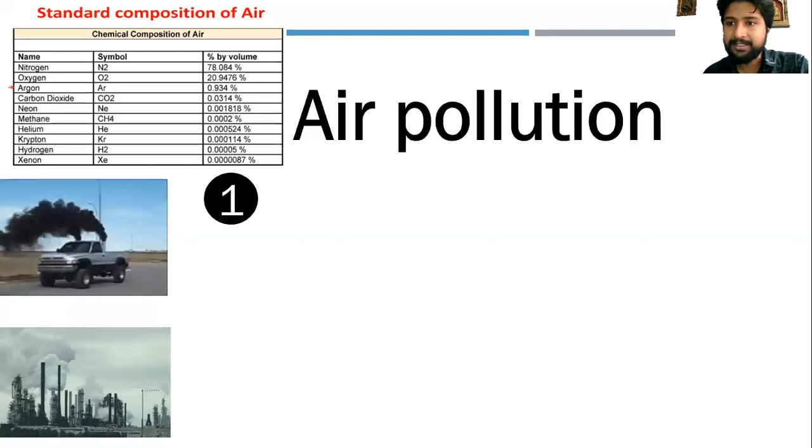Suppose any kind of chemical change occurs in the atmosphere, or any solid, liquid, or gas enters the atmosphere. If that change is useful for mankind, we never call it pollution. But if it causes harmful effects on human health and society, or reduces visibility, or corrodes our environment, then only we call it pollution.

Now look at the definition: Contamination of the atmosphere by gaseous, liquid, or solid waste or its byproducts - that is pollution. This contamination by solid, liquid, or gaseous wastes or byproducts can endanger life, attack materials, and reduce visibility. That is air pollution. Hope I'm clear.

Now the question is, if I'm talking about controlling air pollution, from where can we take control measures? We need to know the sources of pollution, from where it is emitted. There may be two sources of pollution: either the source may be fixed, established permanently, like factories, refineries, power plants - these sources are fixed and we can identify them.

Whether we're talking about a stationary source or a mobile source, in both cases this air pollutant may be of two types: particulate matters, where PM refers to particulate matters, or gaseous pollutants. In this lecture I will mainly focus on the stationary source and especially the particulate matter.

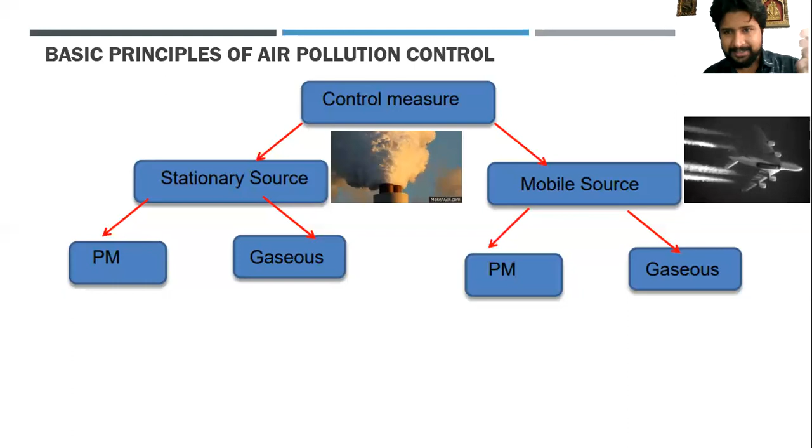Now what actually is particulate matter? I'm sure you've seen particulate matter - when you travel long distances, you can see black carbon particles get deposited on your face, you can feel that. Also, when you pass a beam of light into a dark room, you can see the dense particulate matter clearly. So let's first understand what particulate matter is, then we'll proceed further.

Microns is the size of the particulate matter which is suspended into the atmosphere. And this is PM 0.1 microns. Now, this particulate matter is usually suspended into the atmosphere. And if I talk about the chemical composition of this particulate matter, there may be some different kinds of chemicals, like there may be nitrates, there may be sulfates. It will depend upon the locality from where we are collecting the air sample.

Let's say we are collecting an air sample from the industrial area. In that area, you can find heavy metals as well in the atmosphere, like zinc, like copper. So this particulate matter is composed of solid plus liquid. Just make it clear, it is composed of solid plus liquid. Some moisture is also present in the atmosphere in the form of fine droplets. You can't see it with your naked eyes, it's very difficult.

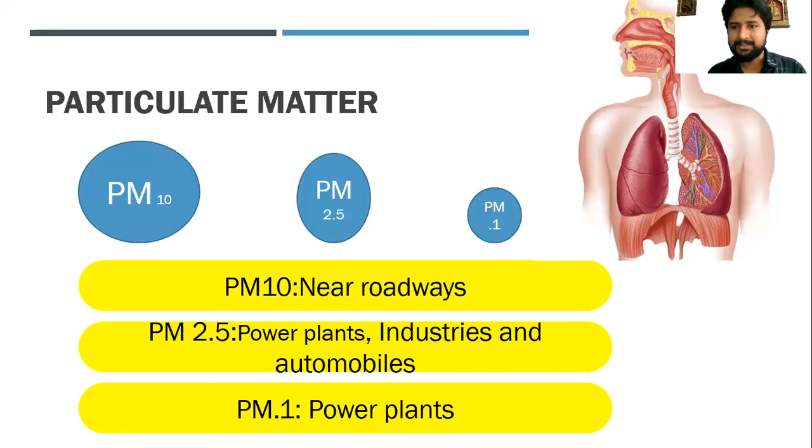Hope I'm clear. So the same thing has been written here: what is particulate matter? PM is a widespread air pollutant consisting of a mixture of solid and liquid particles suspended in the atmosphere. It's not gas. I have mentioned here 3 sizes. Particles smaller than 10 microns can just stick below your throat, and it's very easy to spit them out.

And particles smaller than 5 microns can reach up to the bronchial tubes, that is at the top of the lung, which I have told you. Bronchial tube, this is what? This is the bronchus. It can reach up to this region.

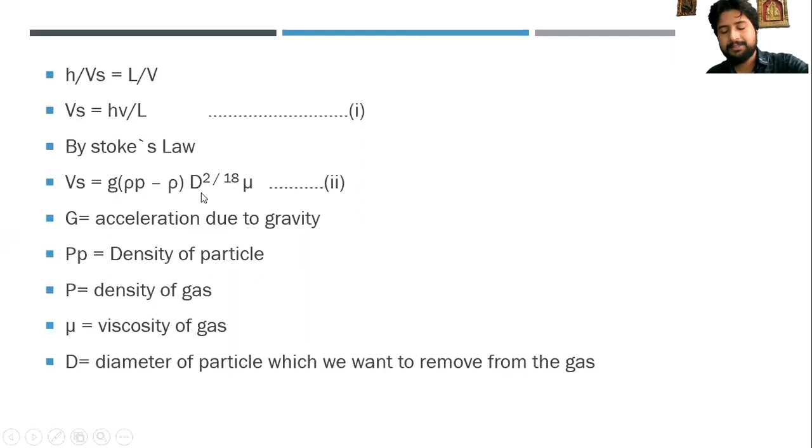And after equating both equations, you will get your final result, that is d is equal to [18 mu H V upon L g (density of the particulate matter minus density of the gas)] raised to the power 1 by 2. This is the diameter of the particulate matter. So particulate matter of this diameter will be filtered when we take a particular height and a particular length.

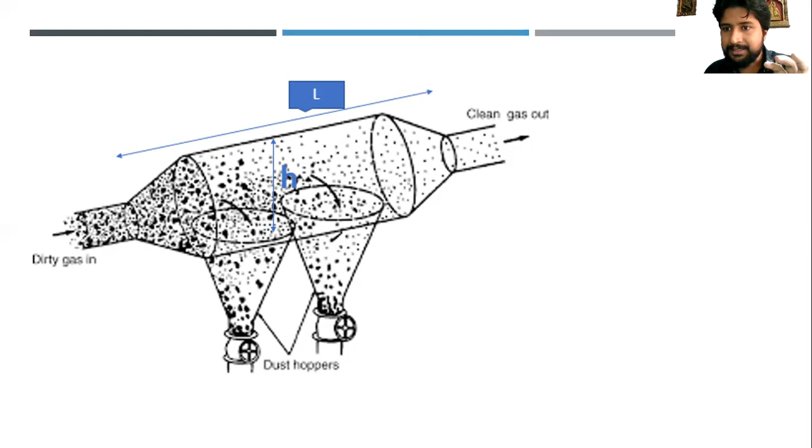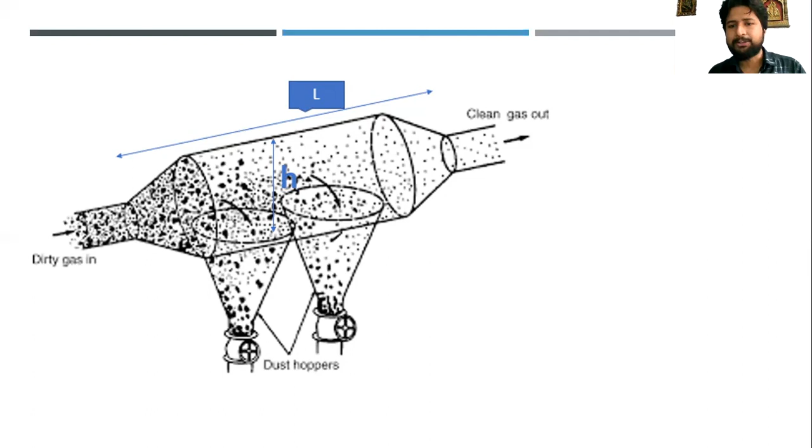But if we talk about efficiency, in which case is this settling chamber more efficient? It is more efficient in filtering particles greater than 50 microns. I mean to say, this settling chamber is meant to separate particulate matter greater than 50 microns. Okay. It can even filter particles less than 50 microns, but it will take too much time, which will also affect the efficiency of the settling chamber. So it is more efficient with the separation of particulate matter whose size is greater than 50 microns. Hope I'm clear.

Now look at this first line. The settling chamber can also be called pre-cleaners. Now the question is, why do we call it pre-cleaners? The thing is that, as I have told you, look at this slide, the efficiency of the settling chamber is not very high. It can only filter particles greater than 50 microns. Okay, but in factories, you are establishing all these equipments in the fixed sources from where the air pollutants are emitted. Okay.

Now, if we use only single equipment, then it might be possible that the minute particles might not get separated from the air pollutant. Okay, and if you emit without separating the particulate matters from your industry, it's a criminal offense. You can't do this. You can't just play with the life of the people.

So along with the settling chamber, we use one or two more equipments in series, and that's why firstly we pass the air pollutants, the dirty air, through the settling chamber. Then after, we can use other equipments as well: we can use fabric filters, we can use electrostatic precipitators along with this settling chamber. So I mean to say, the settling chamber we use at the first moment, so that large particles get separated out, and the load of the next equipment, like the electrostatic precipitator, will be decreased.

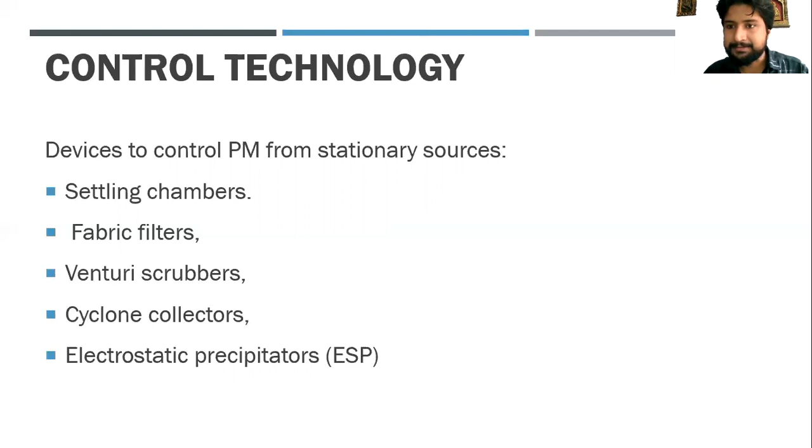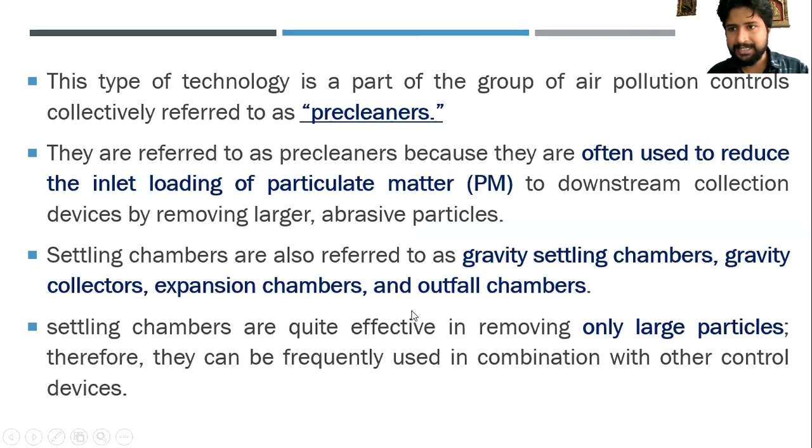That's why we use it at the first position, prior to using any kind of high equipment like electrostatic precipitators. Hope I'm clear. And that's why we call it what? Pre-cleaners. Okay. The same thing has been written. Just go through this slide. It's the same thing which I have already discussed.

Now, the working principle: as I have told you, it will totally depend upon gravity, and it's the simplest one, no doubt, and its size will depend upon your requirement. It may be horizontal, it may be rectangular, it may be long cylindrical. One thing is very important: what material this settling chamber can be composed of. We can never make this settling chamber with the help of metals.

Why so? Because the particulate matters present in the air may be of different forms. They may be sulfates, nitrates, or a few metals which may react with the chambers of the settling chamber and may produce several types of secondary gases. So it's very difficult to say which type of gas will be produced in the settling chamber.

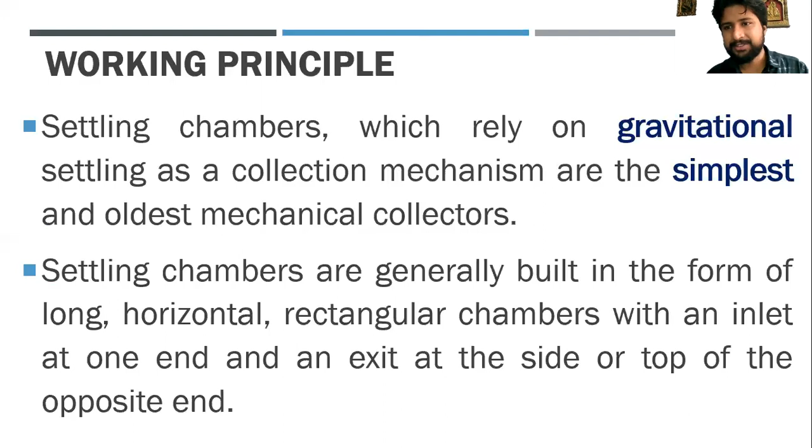So to avoid this, we make the settling chamber from bricks, from cement, to avoid such chemical reactions in the settling chamber. And finally, we get fresh air. Okay, not too much fresh, but a kind of fresh air we will find after passing the gas through the settling chamber.

Now, as far as its efficiency is concerned, I have already discussed this. It is more efficient at separating particles greater than 50 microns, 50 micrometers. And when we increase the residence time, the stay time of the gas in the settling chamber, automatically the efficiency will increase. Also we have to keep the velocity into consideration. I've already said that if you increase the velocity above 3 meters per second, it's very difficult to separate out the particulate matter suspended in the air.

You have to keep the velocity less than 3 meters per second, and not less than 0.1 meter per second. It's a range. If you keep the velocity of the gas in this range, the efficiency will be higher.

Get your point? And the last point is that settling chambers are most effective in collecting large or dense particles, so obviously the particles must be greater than 50 microns, but they often fail when the chambers become plugged with collected dust. This is a problem. Often the hopper gets plugged, gets blocked, and it's not working properly. All the time we need to clean it out.

So the basic funda behind this settling chamber is that it's the simplest one. There's no hi-fi technology used here. It's very cheap. If I look at its cost, it can be afforded by any kind of industry, any kind of power plant which has been recently launched. So it's very easy to establish in factories.